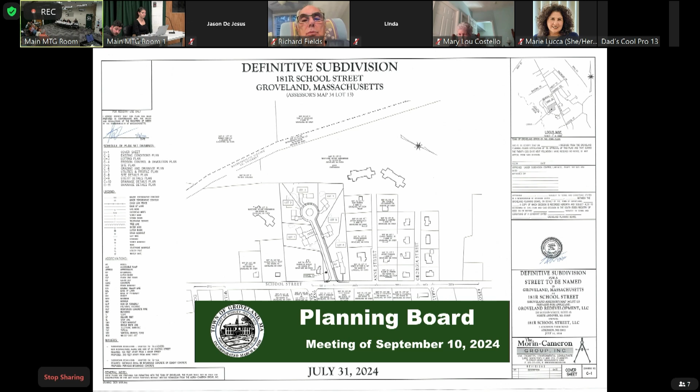So as you mentioned, it is in the R2 zoning district. The zoning here is 30,000 square foot lots, as you know, and 150 feet of frontage for your single-family dwellings. And when you do a two-family, it's 40,000 and 200 feet of frontage. We don't have any wetlands on this site, and I'm going to walk you through our process. The plans are kind of set up in the process through which we go through our vetting and design process.

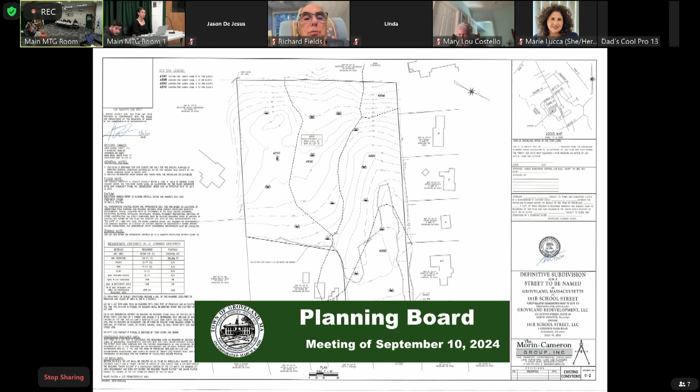So right out of the gate, we did a survey of the property. This is topography and boundary. During this process, we are investigating all the utilities that support the project: the public water in the street, the public sewer in the street, electric, communications, and if present, stormwater management. We also conducted extensive soil testing on the site, a big part of our design work.

Oh, is there a light? I'm not going to touch anything. Right over here. EJ's back here. Brilliant. Thank you.

The soil investigations help us understand factors such as water table, our soil type and consistency, which plays into what we can do with infiltrating water into the ground, and evaluating any of the conditions of the site. In this case, it's a wooded lot with developed land all around it. The Whitestone Village, which I assume a lot of folks are here from that community, wraps most of the property, and then there's developed single-family homes on the other side. So everything around this is developed for some sort of residential use.

It has frontage on School Street. The orientation of the plans, I kept the street at the bottom of the plan, as you see here. North is actually more to your right, so School Street's kind of a north-south orientation. So I'll talk mainly to the plan orientation as we're going through this to make things a little bit easier.

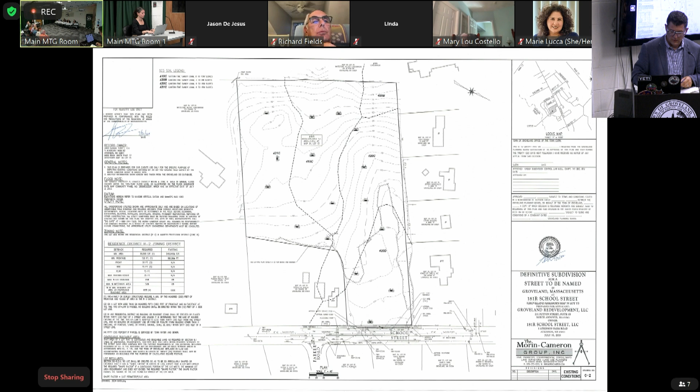So the subdivision process, as you're well aware of, is a state statute that your community adopted, a subdivision control law that enables landowners to create access to their land for development of homes. In this case, we are proposing a 575-foot-long road that's measured from School Street to the end of the cul-de-sac. And that street would create the frontage for the 6 house lots that are going to access through that street.

It would ultimately be our intention that the street, because it complies with the subdivision regulations, would be adopted as a public road. The typical process, we don't have any intentions for it to remain private. We can vet that process as we go through this, but our intention would be that the geometric and construction specifications for this road are going to meet the town standard, and thereby could be accepted as a public road eventually.

Starting from Lot 1, which is the bottom left corner. So starting in Lot 1 here, this is a 40,000 square foot lot with 316 feet of frontage. The next 4 lots all have 150 feet of frontage and are 30,200 square feet, 30,030 square feet, 32,800 square feet, 32,700 square feet, and then Lot 6 here, 40,000 square feet and about 316 feet of frontage.

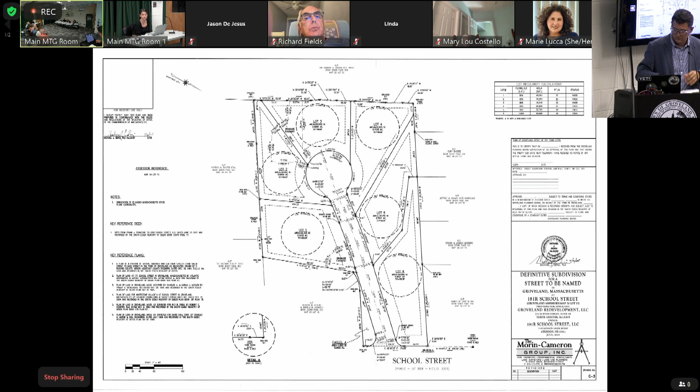Walking through, so we included information here. We're also applying for the land disturbance permit for this. A big part of construction is managing your project during construction. There's a period of time where you have cleared the trees, you've altered the land, you have exposed soil. How are we managing that?

This project would be subject to all the federal statutes for stormwater pollution prevention that are very commonplace these days, as well as your town bylaws and oversight. In past projects, and I don't expect this to be any different, your consultant has also been with the project throughout construction to help oversee it. So eyes from the community's representatives are also on the work.

In this case, we took some time to size temporary sediment forebays or temporary retention ponds to make sure we're controlling that. Ultimately, there's a very extensive specifications book that goes with construction on all the procedures and specifications that you need to effectively manage the construction project.

I included areas for temporary soil stockpiles, erosion controls, and most importantly, we did do our best to preserve a wooded buffer around the perimeter of the project, which was another piece of feedback that we got during the preliminary process.

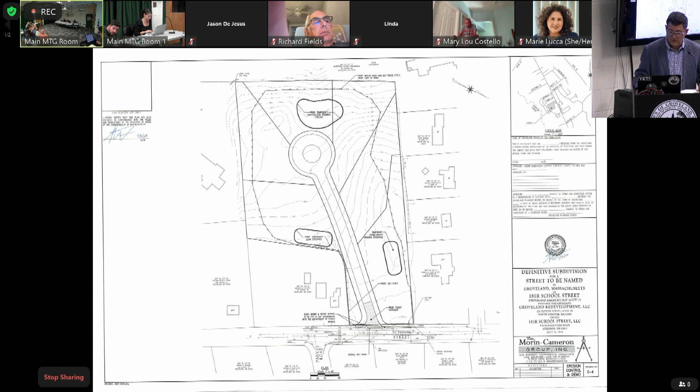Now, what's interesting with subdivision control is to create the road and the lots. Most town regulations, and yours included, want us to demonstrate how they would be built. So it puts us in a situation where we design the entire project, we design homes, but of course, the project is just to build the road. The lots are vacant. Then they sell them to a buyer, so either a homeowner who's going to build their own house, or maybe a builder to build a spec house, something like that.

But that goes through a building permit process. There's an architect and other things. So we don't have the benefit at this stage of the permitting process, which is day one with you, of knowing what the house designs will be. So what do we do? Well, we still have to make sure everything's engineered properly, and we're accounting for development of those properties. So what we did is we assumed larger house footprints, larger driveways, more clearing than what we realistically expect the development to be.

So we're accounting for all that information and data in our stormwater management design. That's an important part of the work that I do, that your consultant, TEC, will be reviewing on your behalf. So we are accounting for not only the road, the sidewalks, and that work, we're accounting for the homes, the driveways, and larger yards around the homes.

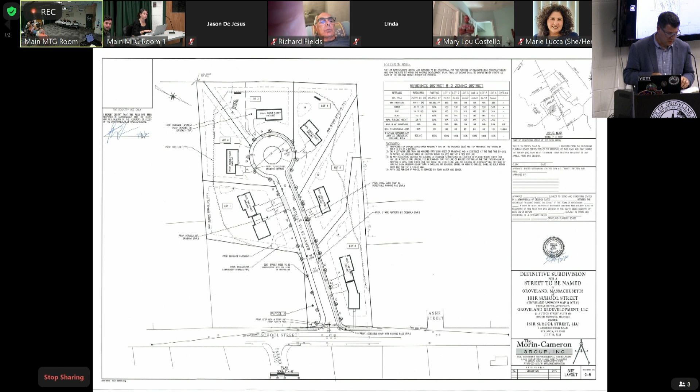Right now, the site itself hasn't been touched. It's been partially cleared, so it's kind of a mess. But this would infill a home, and we will orient the front door to face School Street there. Even though the access will be through the driveway off the new road, it will appear as a home fronting on School Street, which is a nice corner lot feature we included, and that was a request from staff at an earlier meeting.

Moving along. The next plan gets into our grading and drainage. This is the bulk of our engineering work. We spent a tremendous amount of time on stormwater management, the grading of the site, and notably so, one of the more common points that we heard from the preliminary process was concerns about stormwater management.

The slope of the property goes from School Street at about elevation 100 to the top of the plan, which would be west, at about elevation 70. So about a 30-foot grade change across the property, and everything slopes down that direction. There are small bits of the property that might go more to the southeast. The bulk of it goes to the southwest. You have some little areas that go kind of to the northeast, and a little bit that goes out to School Street. So we're counting, and we're getting into the nitty-gritty of where water goes now when we're looking at the stormwater management.

And one of the best ways we can ensure that we don't have any issues with stormwater is we just don't let it off the property. How do we do that? So in this case, when we were looking at the stormwater management, we're designing a roadway. As rainfall lands on the property, on the roadway, on the homes, it's going to drain towards that pavement. So the first thing is catch basin grates, which we're familiar with. We see those. Hopefully nobody's dropped their keys down them before. But that's intercepting the water coming down the road.

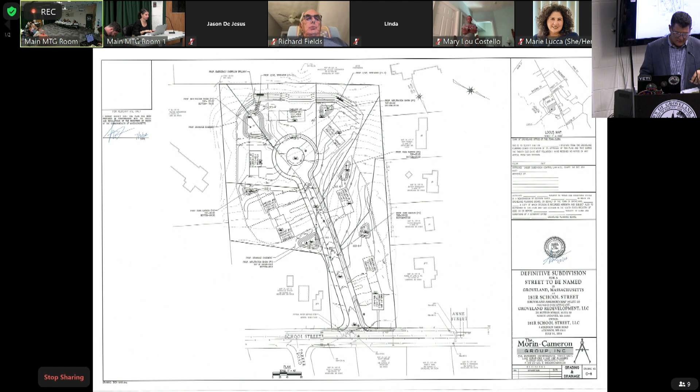Yes, I am using a pointer. I can't really, it's hard in the Zoom. I saw that message pop up. Let me see if I can do both here. All right, for those online, okay, we'll use this here.

So we fill this up so that the cul-de-sac itself is a low point. So if the basins fail, it's going to fill up the road, instead of letting that go out. So some fail-safes built into this to ensure that we're not letting the water go out. Even in a catastrophic situation, there's a lot of redundancy built into the design. Your consultant's going to go through all that in a lot of detail.

As far as the slope of the road, I have been talking about the grade change. The road itself isn't very steep, as it turns out. We're well within the vertical design parameters of the subdivision regulations, 30 mile per hour design speed. It's relatively straight. There's not a lot of vertical curvature. We have slopes from flat, so we come up a little bit at School Street. So cars that are exiting onto the street are at more or less a flat elevation, so we're not having to go uphill to exit. It's flat and tipping down a little bit back towards School Street. That helps with your cars getting in and out of the property.

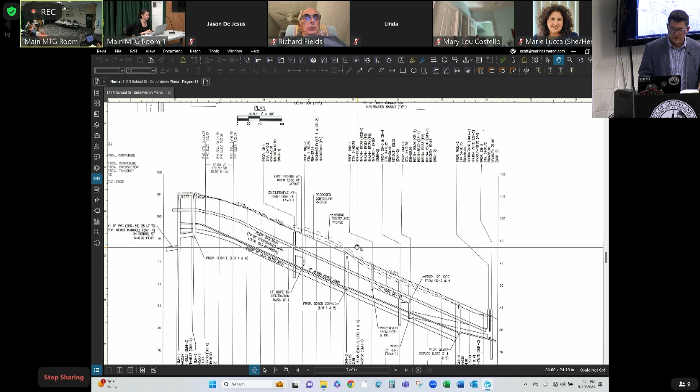And then we're looking at 3.3% slope, 4.5 maxing, 4.3, and we carry that through. It's your normal sidewalk slope. It's under that. So we're relatively flat with the construction of the road. And that's more or less following the existing centerline topography. So we're trying to balance. We have a little bit of cut here and a little bit of fill here. So we're trying to minimize earthwork, and that's another important aspect to getting the work done quickly. We don't want a massive excavation project where we're moving dirt around for months upon months. This should be relatively quick because there's not a whole lot of earthwork going on.

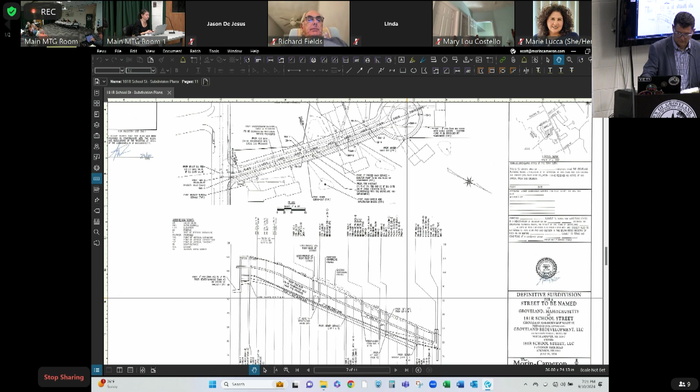Okay, I'm going to go back up a little bit here and talk a little bit about the documents in your package. I'm just going to the cover sheet because this shows kind of the context of the property. So as far as utilities go, there is public water available, there is public sewer available. Because of the elevation of this property, each home would have its own private ejector pump. Those would pump into a common force main, and that goes back up to School Street.

Again, this is typical when we have these situations, but your engineering team will review all that and make sure they're satisfied with it. And there's electric available, of course, and communications. We're not making any connections to any closed drainage, so we don't have any connections. We're controlling and managing the stormwater within the property.

As far as transportation, I did include in your packets information on transportation. Single-family dwellings, on average, generate a little under 10 trips per day for your average single-family home. This is the Institute of Transportation Engineers data, it's very well accepted. There's a ton of data on single-family homes. So what does that translate to for us?

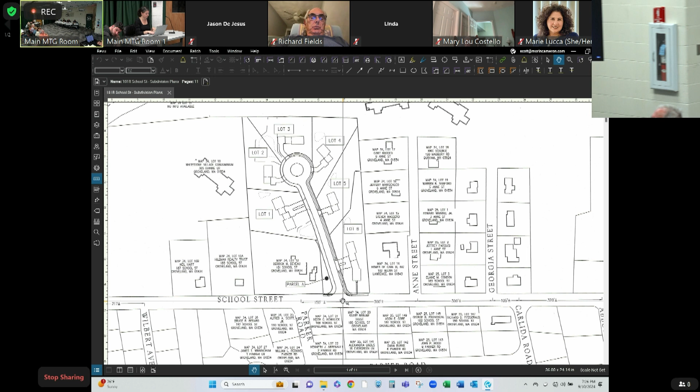And there's a couple things we look at, mainly is this going to create any safety issues on the public way with respect to traffic? Based on the sight lines and the very low traffic volumes, we don't believe there's any risk at all of any issues with traffic. This isn't an intersection that's being proposed on a sharp curve where you would have sightline issues. It's a straight road, it's wide, it's clear. It's also consistent with the neighborhood, and I did include on here, so you can see from Georgia to Anne Street, 300 feet.

The waiver we're asking for is from Anne Street to our proposed road, 300 feet, exactly consistent with that street line. Going down the other side, 217 feet between Wilbert and Doris, and then 320 feet from Carilda to Abbott.

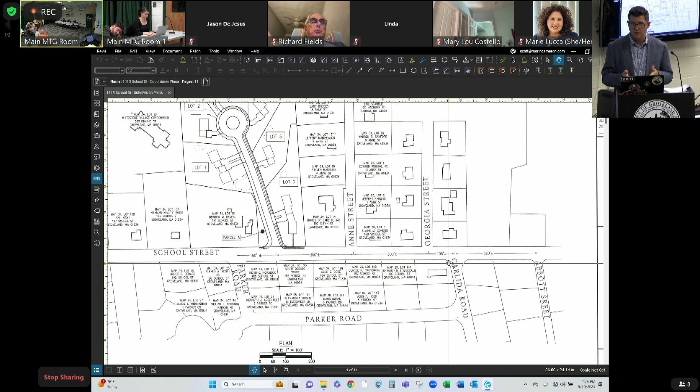This is also typical of the neighborhood. We're not asking for anything unique or different. It's already like this here, so we're not creating a situation that might create confusion on the public road. It's typical, expected, and consistent with the neighborhood. So we are requesting a waiver for that.

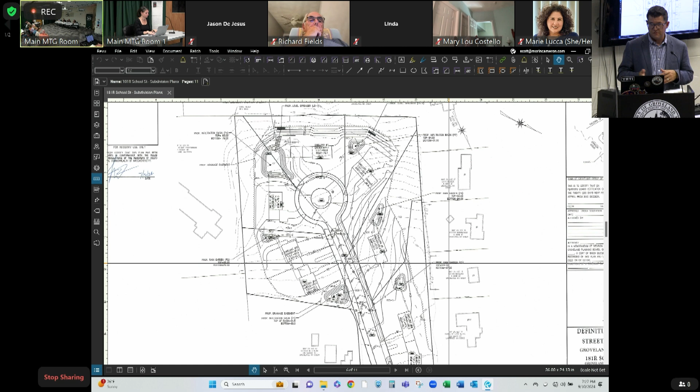The second waiver we're requesting relates back to stormwater management. This waiver is about our efforts to implement sustainable stormwater management and construction practices in all our designs. Your bylaws, state and federal regulations are all promoting this. It's been part of our culture as civil engineers for more than two decades, but there's a lot of focus on sustainability now, especially with climate change and more intense rainfall. We are very mindful of that.

So the second waiver we're asking for is hard on subdivisions because we have a town specification for constructing a road, and that's pretty typical — pavement, asphalt, curbing, sidewalks, very linear design. There's not a whole lot of creativity to it.

But where we can take advantage of sustainable measures is by making these sidewalks — close to 600 feet of sidewalk, 5 feet wide, not a small amount — a porous, permeable pavement. Effectively it functions the same as a lawn, or better, from what I've seen with these built. So we're asking for a waiver to modify the paving specification from normal pavement to porous pavement for the sidewalks.

Why sidewalks? There's no vehicles on them to compact them, you're typically not sanding them, and they require very low maintenance if any at all. I wouldn't feel comfortable asking for that for the road, because ultimately we're looking for this to become a public road eventually, which would go through a town meeting process. If I was a DPW director, I wouldn't want anything to do with that because I don't have the budget to maintain it. So the sidewalk, we think, is a

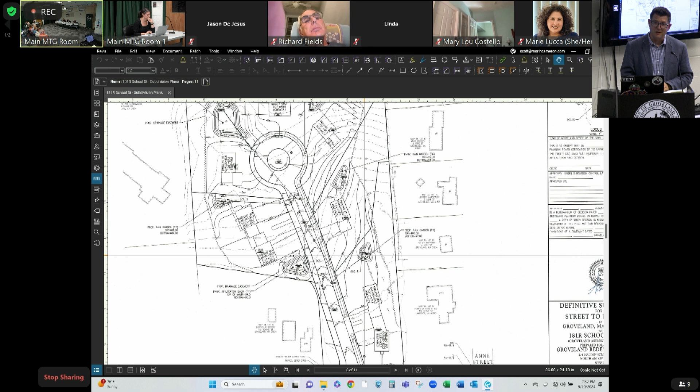Again, I don't have much more to present other than I do want to thank you for the time tonight. I know we have a lot of people here, and there's probably a lot of questions. It's our hope to take tonight. We waited more than 7 months since the preliminary plan, so we have 135 days on this application, which is a good amount of time to go through it and vet it. I know we funded the peer review already, so your consultant is funded, so we pay for that to review on your behalf. We're looking forward to getting this process underway with you, starting right now. So back to you, Mr. Chair. Thank you, appreciate it.

What's over here? Does anyone have any questions up here? You guys have any right off the bat? Think of anything right off? No. Did you have any outstanding? Nothing right out of the gate, no. I have a question. Not yet.

We're going to talk through the board first, and then I'll end up opening it up for public comment. I have a question about the... I actually am the board. Well, it just says Dad's Cool Pro 13, Wally, so I couldn't tell that was you. That is totally accurate. But anyway, thank you, Wally Sorensen.

Still, I've been listening to this, and I see the plan presentation. Is this Mr. Needy's project? Say that again, Wally, we couldn't hear you. Is it Mr. Needy's project? Mr. Tom Needy? Nope, who's up? No, it's just the Morin-Cameron Group. Is that Moore what I'm seeing on the Cameron plan? Morin-Cameron, Moore County. Thank you, yep.

When you mentioned in the process that you're just building a road, is there not a developer or builder assigned to this project yet? So the present plan right now is to permit and then construct the road. There very well will be a builder involved at some point, but right now Groveland Redevelopment LLC intends to build the road and sell the lots. So that could be to a homeowner, or as I mentioned in my presentation, to a builder.

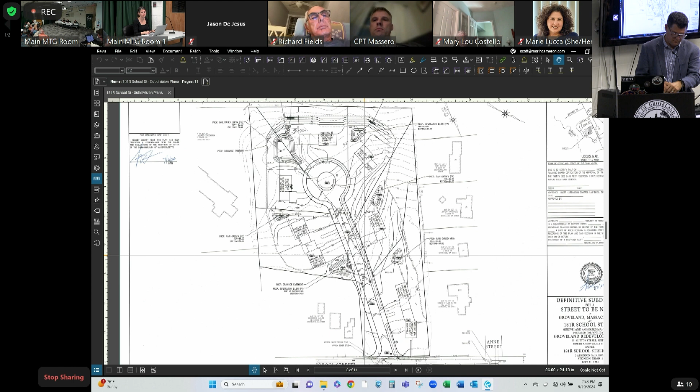So you're going to build a road, okay? Which means - and it may not be you - but there is someone on this application that will be in charge of the project, putting up the surety, and be fiscally responsible for every single thing that needs to be done. Who is that? Groveland Redevelopment LLC.

Okay, so that - and then that person is planning on just selling the lots off to the highest bidder? So who's going to be in charge to make sure the subdivision, if approved, is completed as the memorandum of decision is issued on each item?

If I might, Mr. Chair, Eric Loth from Groveland Redevelopment. I'm the principal sponsor, the developer, I guess you'd call it. The parent company I work for, which you may know a little better, is Minco Development. We're based in North Andover. I grew up in North Andover, I still live there. Our company's been in business there for over 40 years. We were the ones who, 3 or 4 years ago, brought forth the previous 40B looking development.

After a while, we realized that really wasn't going to fit in this location. So we came back with something we thought made a lot more sense and fit a lot better into Groveland, and we still knew there was a need for.

But I want to reassure all the board members and everybody here that we take a lot of pride in what we do. Most of the projects we build, we hold long-term. Most of what we do is larger apartment complexes. We've built over 3,000 housing units - condominiums, townhouses, apartments - in North Andover, Newburyport, Andover, basically the whole area. So I can appreciate the concern because I've seen that a lot of places too.

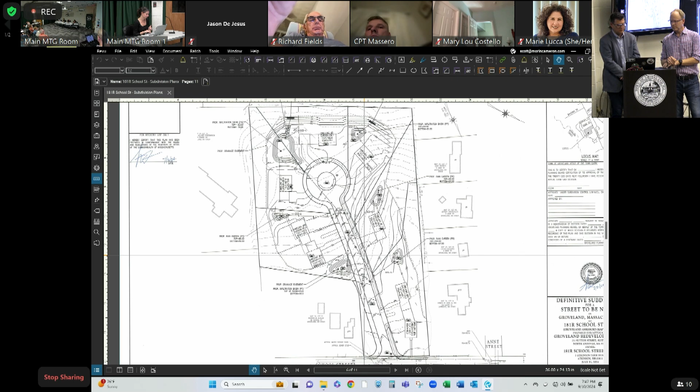Imagine if you have 6 homeowners coming in to get a house and they don't know how to build a road, a street, or get anything done, and things that they have to do on their own individual lot, and they have to put up a lot of money and buy the house at the same time. And building lots of homes in Groveland, like other surrounding communities, are really coming up in price. And that's an increased burden on the future citizen that we're responsible for as well.

Our current citizens, that's who we work for. And the future citizens, protecting them during this development. So something that you can work around in-house. We don't need an answer on that right now. But it has been a problem in a few subdivisions, and the board will have to discuss very large stopgap measures to prevent those kind of things from happening again. But the simplest thing is just assign a reputable builder developer to it, and then there's no issue with those kind of things. So, suggestion.

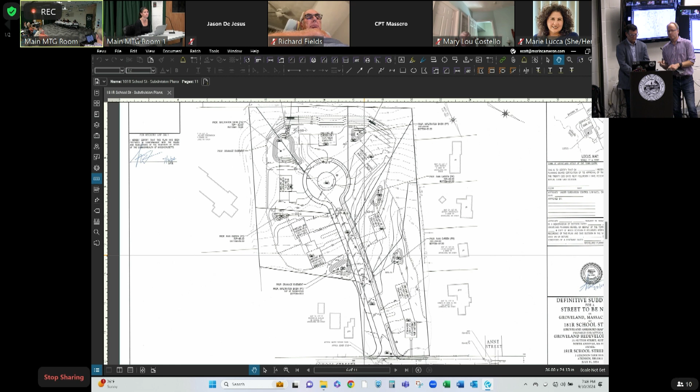I appreciate the comments, and just to answer one of the questions, our plan right now is at the very least to stay involved, build the road, and complete the lots before we'd think of selling any of them off. So we will be responsible, we will be involved all the way through that process. Just for us, the economics of building homes doesn't really work for us, but we do want to stay involved, build the road, and do everything involved with the lots, and then sell the finished lots. I've talked to a couple of builders already that said, I'll take all of them together, so that might alleviate the board's concerns, but I don't know yet until we get to that point.

So, thank you. I think if I could further, it is our first meeting, and I'd like an opportunity to probably talk through with staff and look on precedent, recent subdivision decisions that you've issued, and make sure this is in line, any issues you had on those prior ones, that we alleviate those with this one, and just keep it fair and equal to things you've done in recent past that maybe was a success. So let's learn from it and make sure that we keep things fair and equal.

Agreed, and that's why we have these meetings. Yep. Right, that's why it's not a one-time thing. And Wally, thank you. That's one of the benefits of having someone like Wally, who's been around a long time, to have the history of the town with that. So, thank you. I appreciate it.

Quick question for me was, when you talk about the redevelopment, are you doing all the way through to grading and drainage, or are you leaving just a lot to build? How far into the build? Yeah, please. Absolutely. So, again, this is going to distill down to your process and what you typically do. In my experience, we typically want to have the road up to binder, so it's stabilized, all of your supporting infrastructure is installed, so that when the builder comes in to do the house, they're connecting to the utility service stubs and they're ready to go. So all that work is in place.

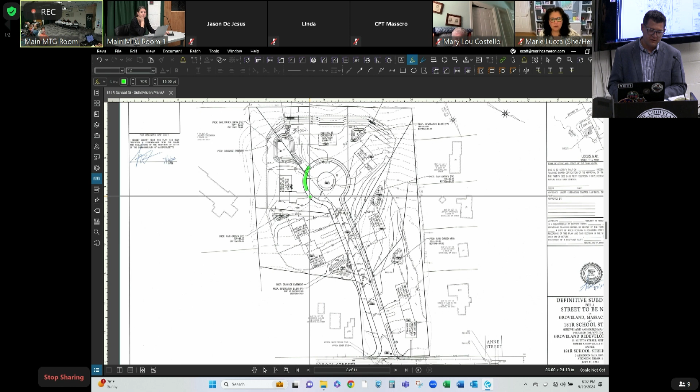No, I think our question is, it looks like there's an outline that basically is the same as the other side. Oh, I see what you're asking. Yeah. It takes me a couple times because I'm an engineer. Oh, no worries at all. It takes me a couple times because I'm not. Right, we're lay people. Different languages. All right, exactly.

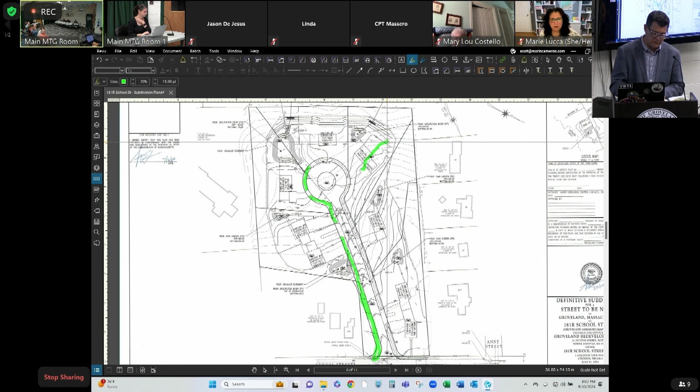Presently, on this side of the street we just have this as a grass strip, which would contain your street trees all the way down. So this would just be lawn vegetated on that side. Yep, and it looks like what you're seeing is the edge of the right-of-way line and the edge of the pavement. If I were to zoom in on this a little bit so you can see it in more detail, again, 40 scale drawings are hard to read sometimes. We're zoomed way out. That's what the regulations ask for.

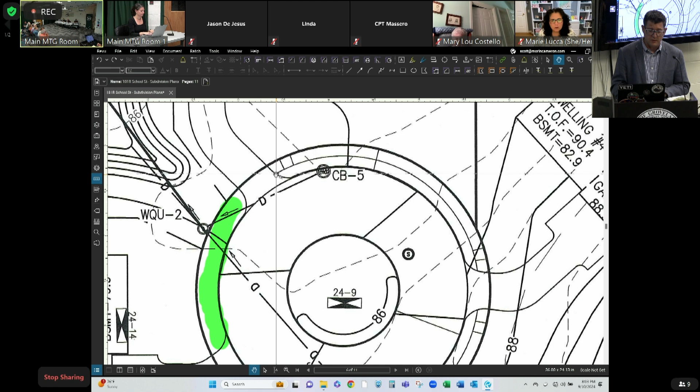Which is typical. This is the sidewalk line here. So you see on this side, we have the line, these lines going across indicate the curb ramp coming down, and there's details for that at the end in the construction detail set, and that's all per town spec. So the idea being we're taking the sidewalk, in this case, we took it here. We didn't bring it to this driveway because in my experience with these small subdivisions, even if you have sidewalks, nobody uses them because there's not cars on the road frequent enough to warrant that. Off of School Street, a numbered state route, we're going to take a look at it, and we'll report back to you at the next meeting. So we hear the concern.

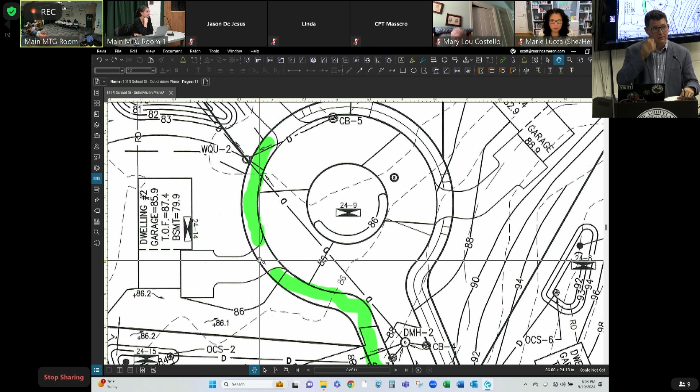Just out of curiosity, was it explored to have a sidewalk going all the way around? It's my understanding, I may be wrong, it happens occasionally, that it's only required on one side, and all of the subdivisions that you recently approved, being Billis Way, which is also on a state highway, 113, and Katy Lane, all have the half sidewalk. They do not have the sidewalk that comes up fully around. So it has been historic, and it is per regulation that it only be required on one side. You could do full side, it doesn't say that you can't, but it doesn't require it. It only requires half, and all of the other subdivisions that you've approved recently would follow that.

Yeah, no. I challenge that. The regulation is for a sidewalk all the way around. How they've been getting around that in certain areas, for instance, Katy Lane, as you mentioned, up off of King Street, because there was not a sidewalk that connected all the way up, was that a waiver was issued on that. That sidewalk, particularly on a state highway, is required on both sides. We'll look into that piece of the regulation. And like I said, one of the biggest things that we had during the town survey was not enough sidewalks for people to go on.

And as a father of 3, I can tell you, I was pushing strollers on sidewalks, and any parent, you don't know what's coming down the street, and I don't mean the residents usually, the UPS guy, the FedEx guy, some guy making a wrong turn. The last place you want to be with an infant or young children is in the middle of the street. So I challenge that with any parent. They may push back a little bit on your logic on that. But let's take a look at the sidewalk around on both sides. The planting strip has been eliminated, where you mentioned the shade trees. And for good reason, we do still have to have the 2 street shade trees but they're put into the lot.

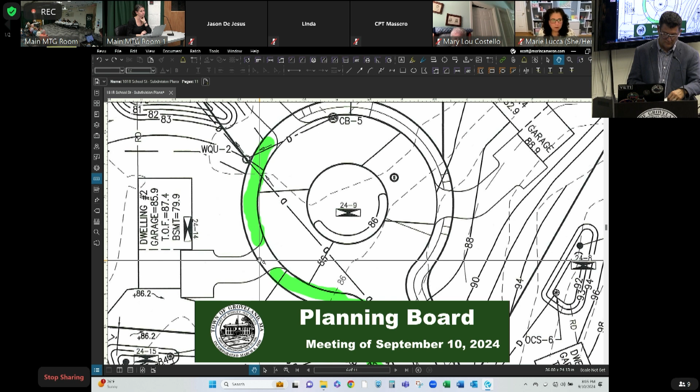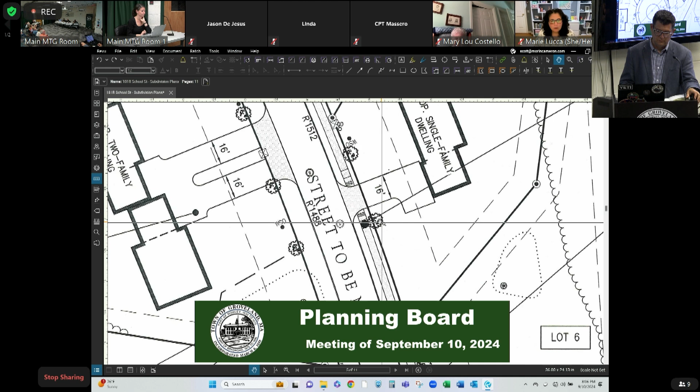And the reason what's happening is if you put them in the planting strip, as they mature, they break up the sidewalk and it becomes unusable. So about 18, 19 years ago, we actually kicked them off the planting strip into the property. It looks better to have 2 trees on each person's lot going in, and not in a planting strip, which will end up, or someone will end up, replacing the sidewalk, or it just becomes unusable when the tree roots get large enough. So just to keep that in mind as you're going through with those 2 things.

I'm sure being this is, although it's a definitive plan, it's still really the first time that we're taking a crack at this. So all these little things will actually sift out, and I'm sure they will come into compliance without an issue. Yeah, no, exactly. And not to belabor the point, like you said, I appreciate you taking the comment back and reviewing that. But, as someone who doesn't have a sidewalk in front of their house and wish they did, thank you for taking a look at that.

Sure thing. Yeah, I feel the same way. I have 3 young children, and it's always more convenient to have that sidewalk and the appeal of actually buying a home. But at the same time, I can see that extra yard as well, that frontage. But we'll look at it. So thank you. Thanks for the feedback, yep. Appreciate it.

Jason, do you have anything else? No, I'm good. No? Okay. Wally, do you have any other questions? No, I think that's good for a first round. I think we've really got a lot of missiles in the air on this thing to try to figure out little things and sift them out for later. So, no, that's good for now.

Agreed. Thank you. So I think we have a scheduled meeting already again on the 24th, I think is what it is, in 2 weeks. Do you guys plan on being here for that as well? Yeah, okay. I just wanted to confirm the dates to make sure when we do have more questions as well. As we start to read, now that we've seen this, we can review it a little more in depth, knowing that we've answered some questions, and then it can all be via email as well, right? But at the same time, it's nice to have the back and forth as well.

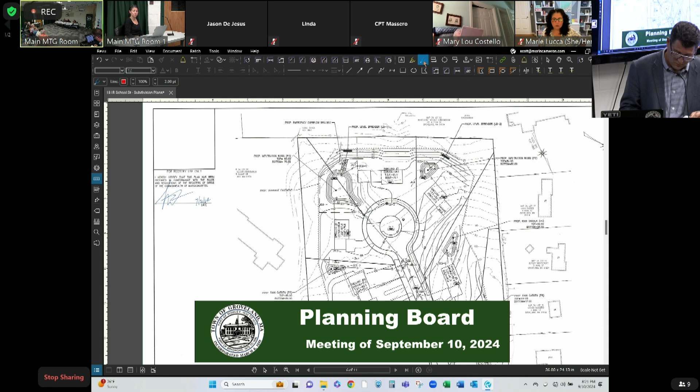Through the chair, thank you for the feedback. We did look at this area closely, but I'll go out and have another look at it and see if there's anything else we can do to ensure your confidence. Yeah, and I know the board talked about the vegetation, and so that is one of the concerns we have: looking at a wooded lot is much more attractive than buildings, so we're looking forward to some vegetative plans. Yeah, absolutely. Thank you for your time.

Thank you. I have a question as well on the pervious. Did I hear that correctly, that the street and the sidewalk itself are going to be pervious, and that there's no closed catch basin system on this? 'Cause I can't see that sheet. Sorry, just the sidewalks. No, the street is spec. Okay, that's good.

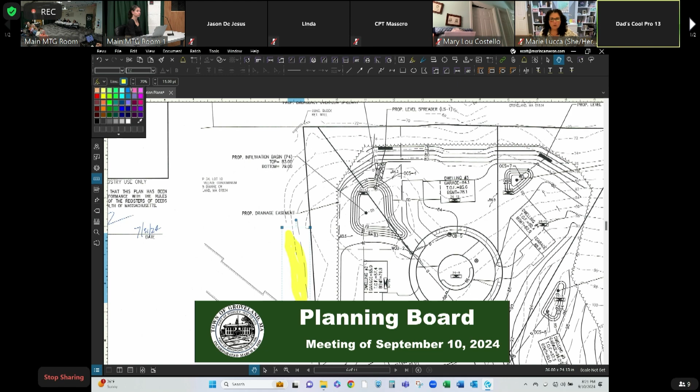Just a board history thing. One of the first places that we looked at this kind of asphalt, which sounded like a really good idea, was up at the old high school and the middle school, and we were looking to get some of this in there to check it out. There were two products out at the time, the engineers might remember. One was called Glassphalt, and it had recycled glass in it, which actually made it reflective in the evenings as headlights came off it.

We did a sample of it just to see how it would work. And the problem that we had is it does become clogged later in time, and it became impervious. And this is New England. If you're going to put up a house today, which, if they're selling, is pretty close to 7 figures these days in certain areas, you can bet people are going to be throwing sand on their driveways and sometimes salt on the sidewalks as well, because of the liability issues. So I would just caution not to think people aren't going to get out there with a spreader, or have their own landscape folks come in and sand and salt.

So something to consider. We did look at this from a town's perspective with a previous road commissioner, and it sounds like a really good idea, and it's wonderful for recharging the underground aquifers, etc. But it did come up as a problem once you enter humans into it, future homeowners and residents and citizens of Groveland, because they are going to throw sand out there. This is New England. Sometimes you get an ice storm. Now, I don't know the limitations of that, but just something to think about. The board can review that.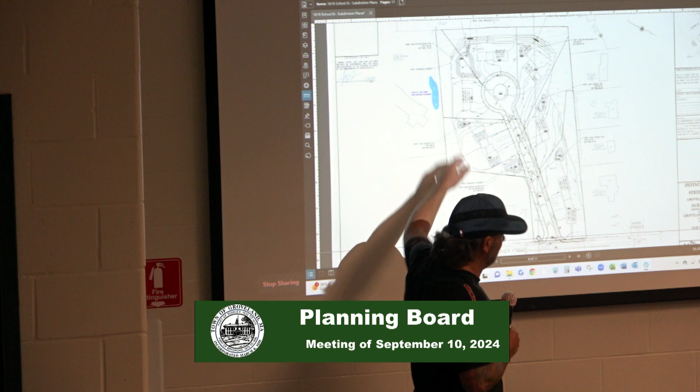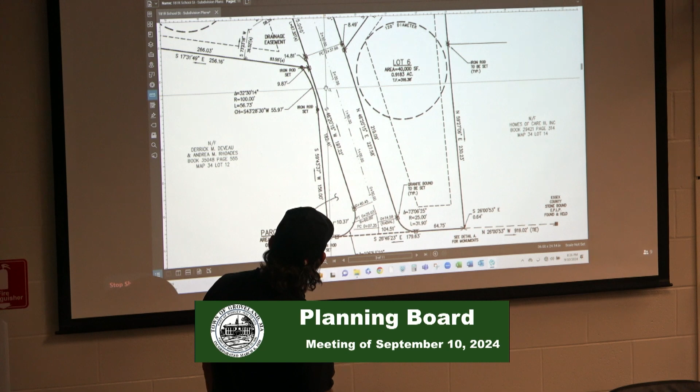But I'm really concerned about the water in my backyard, and what is the distance from here to the road from my lot? Which area? Yeah, where's the corner of my lot right there, right? What's the distance? You guys are getting really close, and you said like 25 feet of coverage with trees, or did I hear that correctly? Not in this area. Right. So I got trees here now. This was already cut down before, which exposed my whole lot. And now you're talking about 25 feet, and we're getting really tight here next to my lot, looking at the street and the development. So water and the 25 feet, I just don't see it.

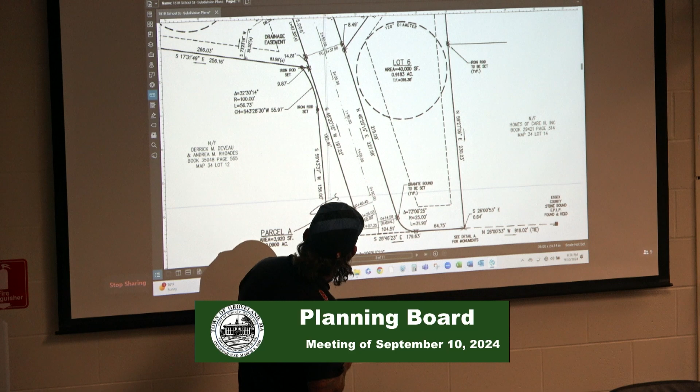What is the distance in this area, do you know? So this is about 20 feet here. And to your point, there are no trees through this area. This had been cleared. Well, they got them all cut down, right? They weren't supposed to cut them down right next to my property. So that was a concern before, because they cut them straight from the whole area. So is there a regulation, with the road being that close to my property? What did you say the distance was right here? There are definitely setbacks, that the road cannot be certain feet from your property line. That's what I was concerned about. And it's a difficult scale, right? That's why I wasn't sure what the actual distance at the shortest point actually is.

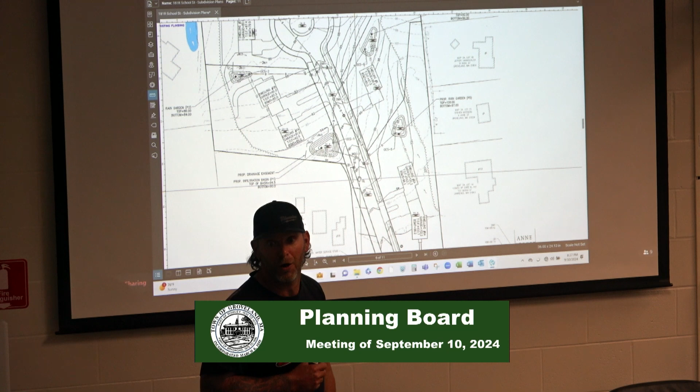At the shortest point, it's about 4 feet at that pinch point to the right of way. But the road itself is another 11 feet away, so you have about 15 feet to the actual road. But then you're gonna have the curb, right? So that doesn't really allow for any tree coverage in this area. Yeah, the curb line is considered the street line. Oh, okay. And what is the distance? Is it 15? I don't know off the top of my head. It's about 15 feet from the pavement itself. So there is space in there, and I appreciate the feedback, and I'll certainly get out and have a look at that area and see if there's anything we can do in that spot. And then you're talking about an area where you dig a hole.

I've dug holes in my yard and it fills up with water and stays there for a long time. So the aspect of digging these holes, it fills up and then it overflows, and the water is a big concern in this area, and that's the biggest thing with me, really. Yep. Okay, thank you. Thank you, I appreciate it. Absolutely, thank you.

This gentleman in the hat, yeah. Hello, Rick Fitzgerald. I live on School Street, across the street from this new proposed development. And I'm looking at the plans versus the previous plans, which I think called for 6 single-family homes. Now we've gone from 6 families to 8. So we have two more families. And are these 2 families going to be affordable housing?

Does anybody know in terms of that? Like I say, we've increased the population on this street from 6 families to 8. There's 4 singles and 2 doubles, so now we have 8 families on there.

Rebecca is much more versed in affordable housing, but that's a state application that would need to be applied for as a 40B project, and this is not a 40B project, so it is not an affordable housing project. It would just be...

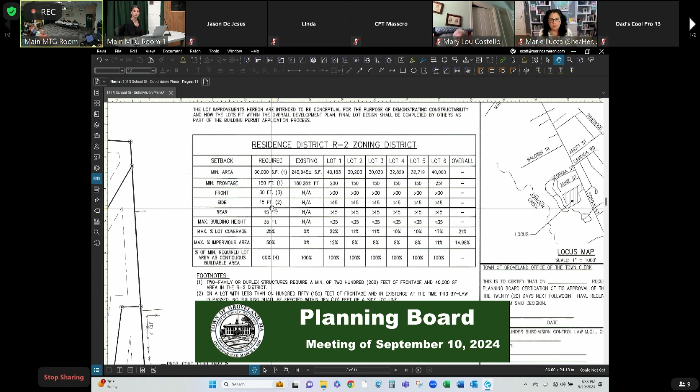So the zoning dictates the minimum setbacks, and I want to call your attention to the setback table. The zoning says that from the frontage, which would be the proposed road, it's 30 feet, and from the side and rear, 15 feet is the closest someone could build a home to the lot line. This is per the zoning bylaw.

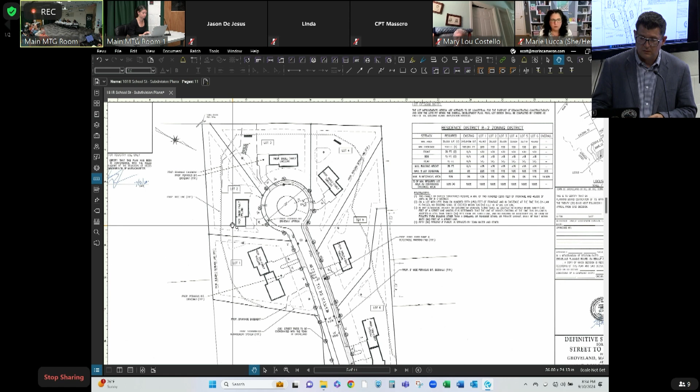We've graphically depicted, again our best guess, a large rectangle - we don't typically build homes in rectangles. But you can see this dashed line is the 15 feet, so from here to here is 15 feet, about the width of my cursor. So if we go 15, 30, 45, about 60 feet is how I've drawn that there. So there'll be 60 feet from here to the stone wall, and then the lot line - which you can see in the other one is quite close.

There's an abundance of trees there now. Are they going to be able to clear all the trees out right up to their line? Or is there going to be any type of regulation as to where the trees will stay, so we'll have some privacy and noise buffer?

Are these trees you're looking at right there planned? That squiggly line right there, that's the tree line that would be proposed - it wouldn't be planted, it should already be existing, correct?

Yeah, it's our intention to preserve the trees in a 20 to 25-foot swath in this area of the property. Everything from the stone wall in, 25 feet back, you won't touch. So we at least got that.

There'll be no plantings - like on the rail trail where the horse farm was, they planted some nice 15, 20-foot high evergreen trees to keep privacy and noise down. Again, through the chair, I think we talked about better defining that - the actual width and how we're going to define and protect it is going to come through this process.

We're going to go back in between now and the next time we see all of you, and I hope you all come out to the next meeting too. We'll have a better understanding of what and how we're going to do that.

Just so I'm clear, I thought when you were making the presentation you said that the footprints on this diagram aren't necessarily the spec. So a builder could decide to move it closer to the boundary than what you have depicted, so long as it's within those setbacks. But if there's going to be a tree line in addition to the ordinary setback, obviously you can't build a house right abutting the trees. So I think it would be helpful to at least get a concept of what that tree line might look like, so people can get a better idea of how far this house will be at minimum from my place.

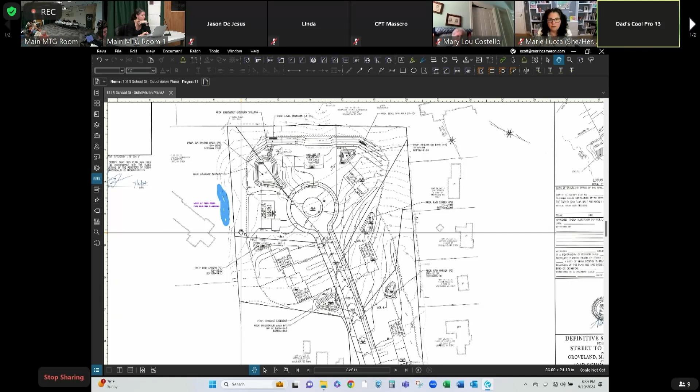But a second question, and thank you to the residents for pointing this out, is that this is exactly the scenario that happens when lots get sold off and the person goes in and doesn't know, or in some cases may pretend not to know, and then a tree line comes down. So the tree line has to be established by the planning board with markers and everything else. And then the buffer zone gets added afterwards because things do happen on a site, and you have to move a house here or there, and you go back in because you can have an established tree line and still be looking into somebody's window.

So the board typically goes in with a double-staked tree line for some kind of buffer zone of hemlocks or something to that effect, and we've done that in the past on almost every subdivision going through. That will eliminate that. And I completely understand the concerns of the residents, and remember, that's who we work for.

But I did have a question that somebody touched on, which was the two-family. Although it's a good concept, and I understand we need affordable housing in the town of Groveland, particularly for seniors, you're going to have an interesting time depending on the builder, and that's why I suggested you find one going in. Because if you're putting up a good-sized home that sells at 1.3 million, which could happen in Groveland, and then you stick a duplex in that may not be up to that value, it's going to provide some interesting sales techniques, shall we say, in development in the neighborhood.

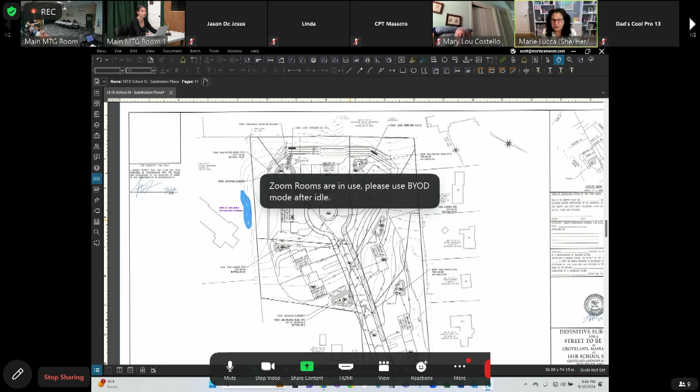So once the property gets sold or the house is built, if water comes on my property and my neighbors, you would sue the property owner, not the developer or the... You would potentially have legal ramifications through the developer, but you would also include the property owner. So that would be a civil battle. It would not be something that the town would be involved in. So if that were to occur, then you would need to contact an attorney and follow the proper suit. But we're not in a position to provide any legal advice at this point in time.

I would imagine the developer is probably going to dissolve that particular company as soon as this development is done. You set up companies with the intention of doing a particular development. That company will be gone. It still would be a matter for the developer and the property owner. It's not something that the town would be involved in. And then the second question, what is your errors and omissions insurance limit? Mr. Cameron?

You're asking for what the insurance, what was that? I couldn't hear you. Your errors and omissions insurance. So if you've done this... I am insured. I guess I don't feel it's appropriate to be talking about that at a public meeting, but I am insured. I've never had an issue in 20 years of practice.

Okay, so you don't want to answer. So if our property is flooded and we try to come after you, you will not tell us what the amount would be. I just want that to go on the record. That is very scary, and I think all of my neighbors and all of the people who are surrounding this development should be very, very concerned. We already have water problems, and I am certain this is going to be extra.

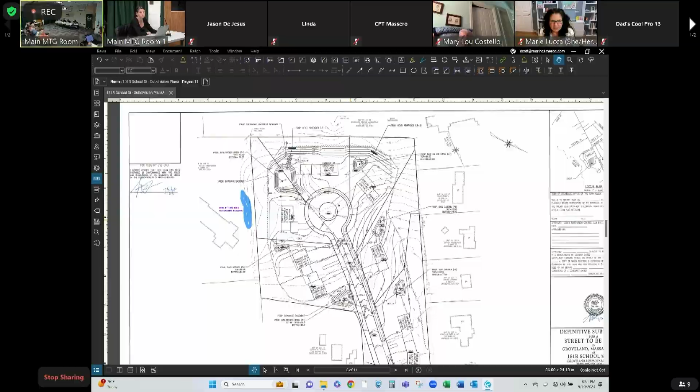Thanks, Wally. Yeah, and I've only been here 3-4 years, and I've already done site visits myself. So it's definitely something we do when we hear residents coming in and saying, "Hey, this is going on. We see water. It's still being developed in the entire subdivision." We go out and take a look at it, and our town officials do the same thing. And remember, this particular project had been submitted a year ago, and water was one of the big concerns, so that has been revisited and is already in the back and forth between developer and the board.

Yeah, and I was going to make a point of that as well, for everyone's peace of mind, and for any future questions they might have. Water is certainly a concern. We understand your concern about it. It's also one of our bigger concerns, if not our biggest concern for this project. So please know that is foremost in the board's mind right now, what that water impact would be, what that drainage would look like. Certainly, it's one of the major things we have our peer consultant reviewer going through as well. So please know that is something we're seriously concerned about, and we're working very diligently with the applicant on this.

We know how difficult the water is in our own properties, and it's even worse in other places. TEC, when they come in, they look at all of these elevation levels and they say, okay, what you have here doesn't work. That's why we have that peer review with TEC. So that's why we wait on their feedback as professional engineers for their guidance. So hope that helps a little bit. Thank you, Marie.

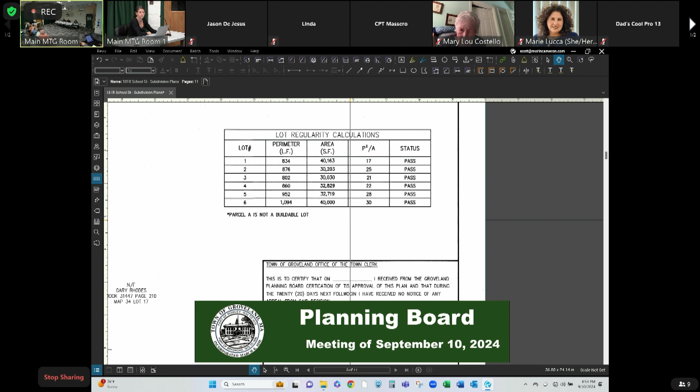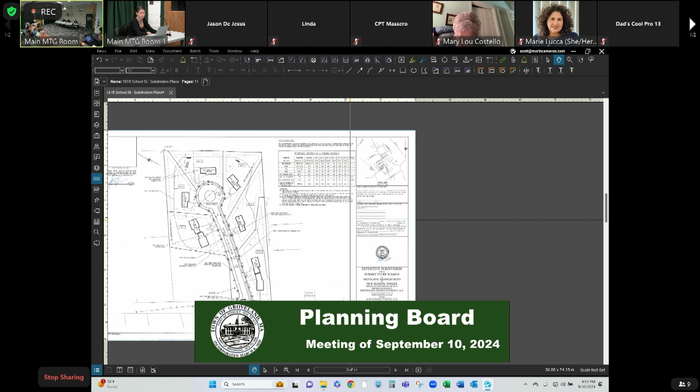So we did talk about the distance between streets earlier. That is one of the waivers that is going to be discussed, of dropping it from 400 to 300 feet. The 300 feet is the same distance from Anne Street to Georgia Street. So distance-wise, it meets those, looks at that same uniformity. But we will review that. As far as the way that the street is set up, if you're coming in from the Anne Street side and then exiting, I think the exiting from street to be named onto School Street is actually, for me, a nice layout because it has that open corner. But it's definitely something we'll review.

If you're exiting that street and you're turning right, I mean, that's a sharp angle to turn right on. And if you're coming from the Georgetown side of 97 to turn left onto that road, I have a hard enough time turning onto Anne Street, which is just a 90-degree turn at times during rush hour. Agreed. It's a tough street. Again, I think when we did the traffic study, it was only 75 cars max and it wasn't an extended amount. Well, I mean, I left for work this morning. I go through Georgetown to get to 95. There's traffic from Ultimate Perk this morning all the way to the light in Georgetown. There's a ton of traffic on that road.

If I could, maybe, Mr. Chair, speak to it a little bit. Graphically, the right-of-way does align on an angle. It meets the subdivision regulations. That is a requirement we have to engineer to, so we're well within that angle to the main road. But one thing we did do, and I didn't talk about this in the presentation, so I apologize for that, we did actually engineer it so as a car approaches School Street, the car actually angles to 90 degrees. So for the experience of the operator exiting the neighborhood, they're going to be exiting at 90 degrees to School Street. It's just how we worked with the curb lines and the striping and the stop control signage at that spot. Okay, thank you.

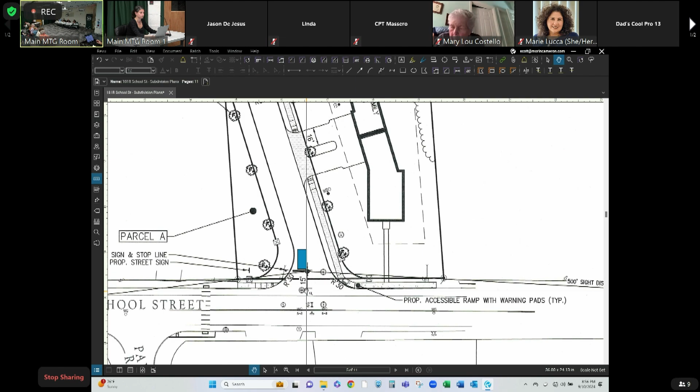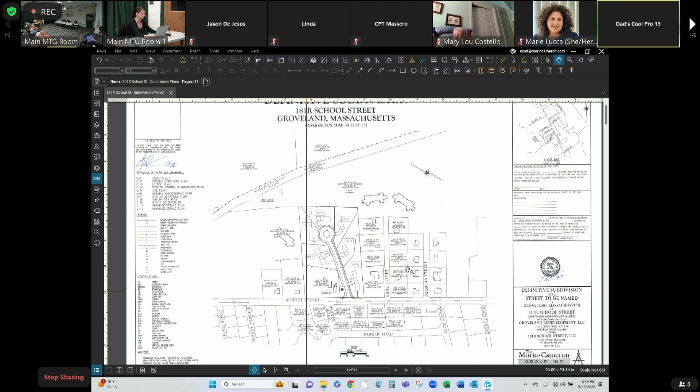Well again, the traffic study will be done on this from an exit point, okay, and Anne Street and Georgia Street are older streets that came in. So the requirement today is what's present. I heard the word waiver on a line of sight distance. Do you have a list of waivers that you're submitting in this application? Not line of sight, Wally, it's intersection waiver. Intersection, okay. Yeah, the line of sight exceeds, so we're good on line of sight. It exceeds that limit, but it's just the actual intersection to intersection that is the waiver that would be proposed. Okay, thank you for that. Are there any other waivers on this list? Because usually that's a requirement too, you have a waiver list. It's the one about the permeable sidewalk. Okay, so just the two? Just the two waivers. Okay, so that's something we'll go out and take a look at.

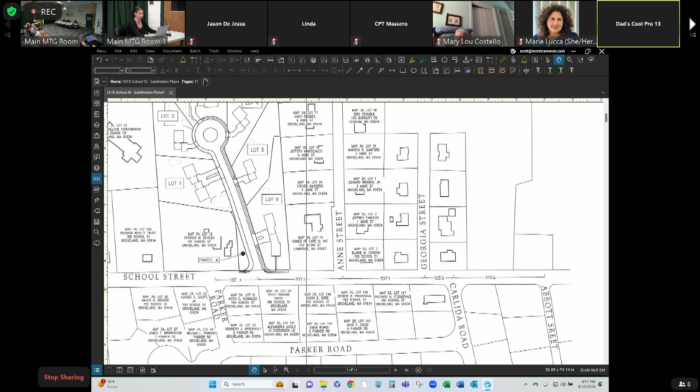And I agree. Just pull up the Merrimack Valley traffic counts, and 97 gets anywhere from 10 to 15,000 cars a day. And Salem Street is another surprise, which is why that set of lights appeared in the town of Groveland, because of the amount of traffic. And it is a problem. And we all know about the problem going down in Georgia with trucks and everything else with the one-ways and people that aren't supposed to be down there. And of course, that's a bigger project. But traffic is clearly a concern that we're aware of. And we will be getting out there and taking a look at that and always do what's best for the residents of Groveland on that.

Because we may be turning out of that street, might be doing an inspection and come out, and you need to have what you need on that. So we'll take a look at that, but it will be part of the traffic study count. And I know there's data that's been provided, but we'll take a look at the other stuff.

Thank you. One more question, please. Absolutely. You've been patient. All right? Yep, absolutely. Okay. I'm Diane Caravan.

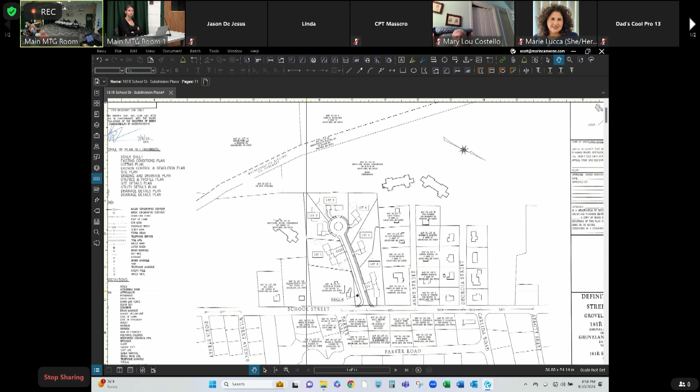I'm on Diane Circle an abutter, and I'm going back to the water situation. First of all, I would like to ask you whether or not the catch basins are installed at the time the road is built, or if each one becomes the project of the individual builder for the lot that they are on, so that we're then relying on several different people to carry through with this idea. And if they are to be built by individual builders, that would leave no plan for the water runoff during the time that those lots are not developed, but the street is there.

Second part of that question is, I don't believe I see a storm drain in the pavement on that road. Now, in my neighborhood, we have several of them around, and they're quite effective. They, I believe, drain into the town sewer system. Is that not something that makes sense for this design? Good. Go ahead, I'll let you take it. Great question. Thank you. And through the chair.

So the first part is what we spent a good amount of time talking about, is how a decision is going to be conditioned to guarantee that the developer, in this case, Groveland Redevelopment LLC, Mr. Loth, who spoke earlier, constructs the road so that it is functioning as intended in the design and reviewed by the town and overseen during construction by the town and consultants, is functioning prior to a milestone, which is typically issuance of a building permit to construct.

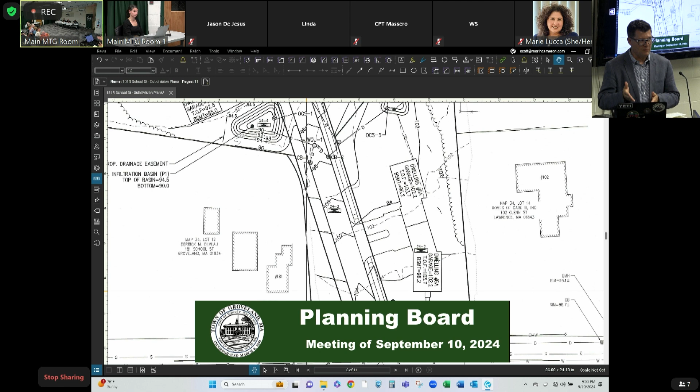So before a builder can even put a foundation in, typically the road has to be to a level of completeness, so that that situation doesn't happen where you have an incomplete road, and there's a whole lot of law behind that as well on what constitutes frontage to qualify for building permit. So you have to have a constructed road to have access to the site. Even during construction, you need to have emergency vehicles enter in situations, so you have to have a road with frontage to build your lot.

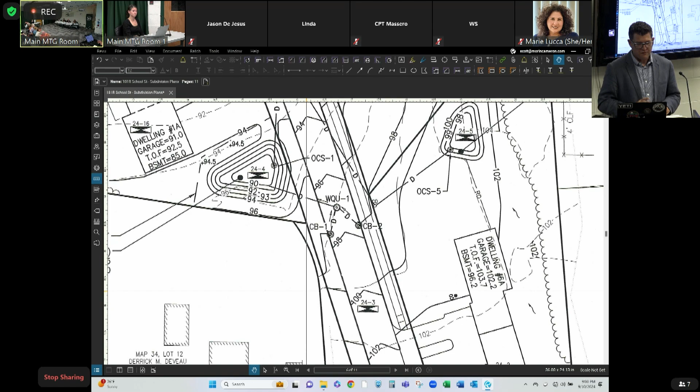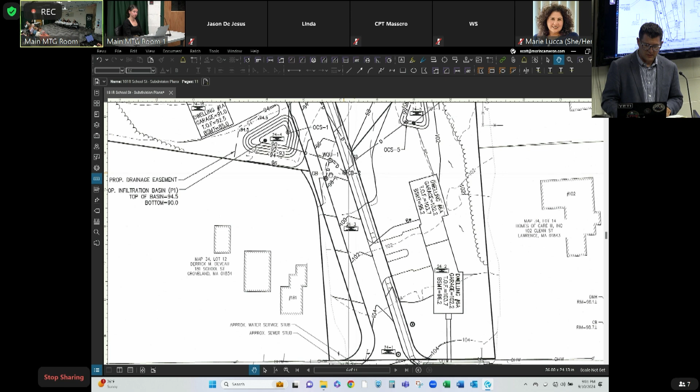With regards to the stormwater management, yes, there are catch basins proposed in the street, and I'll walk through quickly because the peer review consultant is going to cover this as well. But if you look at the screen as you come up, there's a set of catch basins here, right at the end of lot 6, to intercept water coming down the road here. So gutter line, granite curb with the catch basin, which you mentioned you're familiar with.

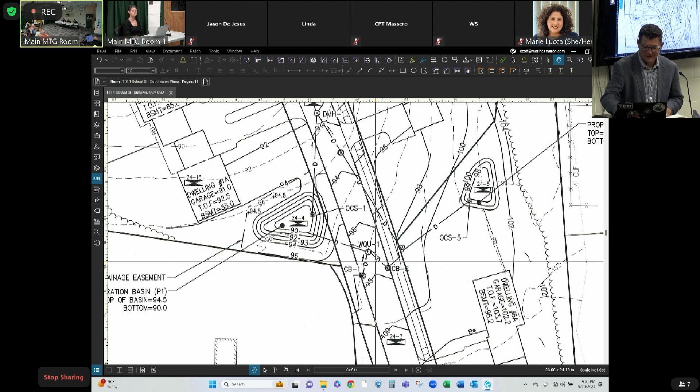Excuse me, what you're saying a catch basin is the grate in the road? Yep. Okay, just making sure I'm clear on your terminology. Thank you. Yeah, the little letter CB, that's the catch basin where you would see the storm grate. Hard to read. It's here.

Thank you. It's tough. Yep. There we go. I know, I'm moving quick. I only had half a cup of coffee before the meeting.

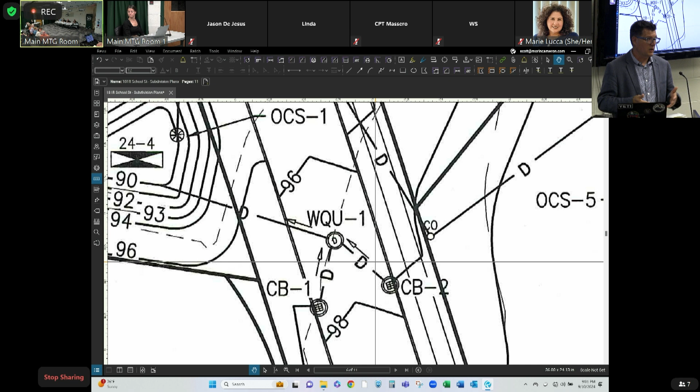So we have these catch basins, and as part of our design work, we look at the type of grate, the size of the grate, to make sure that the water that we intend to go there is all going into that. Okay. So it's being channeled to those before it gets all the way to the end. Correct. In the event that, let's say it gets blocked, leaves, whatever, things happen, right? So, but let's say something happens. Let's say, I don't know, a kid puts a piece of plywood on it. I don't know, stuff happens, right?

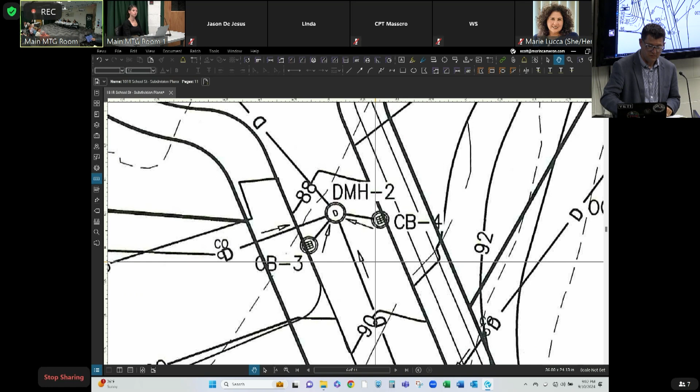We planned for that. There's another set of catch basins a little further down the road, right here. So there's four. And then as you go all the way to the end, there's another one, and this is actually a bigger one. This is a double. So this would be the end of the road, and I'll zoom out slowly so you can see where it is. That's Whitestone here. So there's 1, 2, 3 interception points to get the water off the road, and all the house lots. So all the house lots too.

And then we also designed it so that the road for this whole area, pretty much, if you think of from the center line, pretty much the roofs to the rain gardens, all this, all drains to the road. The road is your low spot. So let's say all the catch basins don't work. The road would have a foot of standing water in it before it then goes to the retention pond, which would be, it's highly improbable that would ever happen.

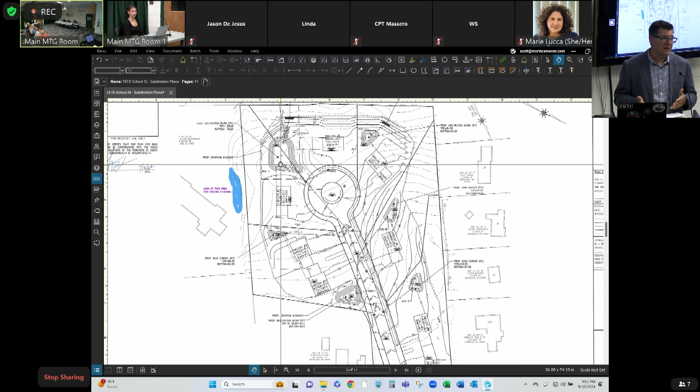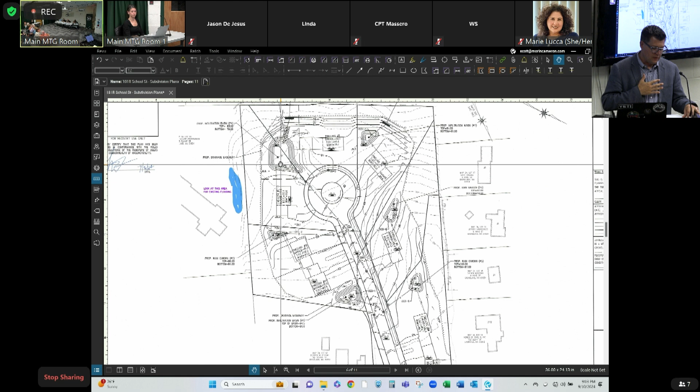So we've put a lot of thought. We heard it during the preliminary process, which helps a lot. That's why I like this process. So we did put a lot of effort into that, and you're not going to take my word for it. The town's engineer is going to review this, and we have a group of engineering folks on either side of the table that are looking at this on your behalf as well.

And the rain gardens that are part of this plan are on the individual building lots? Those are on the lots, and my expectation is that part of the same covenants we're talking about with the trees would also encompass the requirements of the lot owners on these rain gardens as far as maintenance and ensuring they continue to work long-term.

But it would be up to the builder who builds the house on that lot to follow through with that plan. We're gonna work on that. That's part of that earlier conversation of the development of it. As it stands now, yes, that's how it would be, but we as a board know that we need to work on something like that.

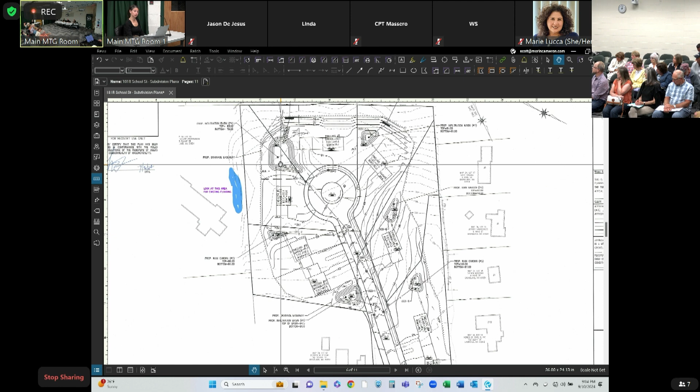Okay, and I would also just like to quickly add that being in a location where I have seen the buildup of the land behind me from a different project channel the water in a different direction than it used to go in, that buildup, that berm, can work in both directions. So I now have more water coming onto my property. Water is on the other side of the berm. Water likes to travel the least path of resistance.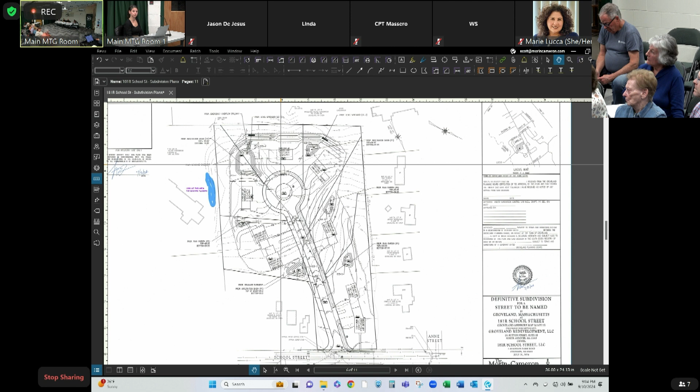I know, of course, that's just how it is. So you're right, it'll go any which way, the easiest way it can. It'll make a little gully and get there. It's gotta be graded properly. Okay, thank you. Thank you. And we've had that before, that we've had developers go back in and redo landscaping because of that.

Hi there, I'm Jess Massero at 4 Anne Street, and I know we want to get out of here, so I appreciate your time and attention to this. I know we've talked about this ad nauseam, so I'll make this brief, beginning on, I think that's drawing C5. I do have overall concerns with the bioretention landscape feature, with the basin and the infiltration to the ground. We are just a steep downgrade from there, and we already have water that comes out sideways from our retaining wall in our backyard. So I know there's more thought going into that, but currently there's large issues.

I teach elementary school, so I do have a 5-paragraph essay to read to you, and I apologize, but I'm better at talking to children. Thank you for the opportunity to speak tonight. I stand before you not just as a concerned resident, but as somebody deeply invested in the character and future of our beloved town, Groveland. 5 years ago, my husband and I carefully chose Groveland for its unique blend of greenery and space, qualities that are becoming increasingly rare as other towns give way to rampant overdevelopment. That's why we moved up here.

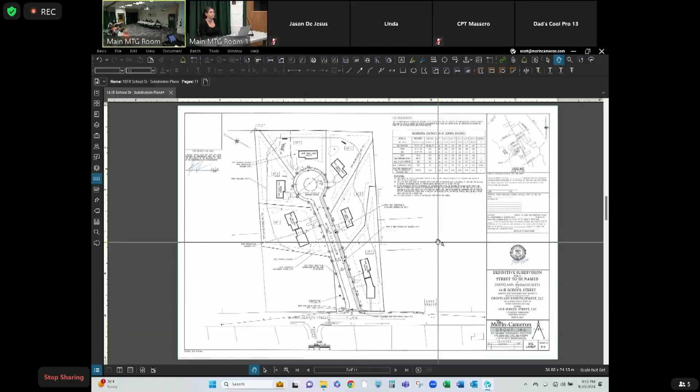Hey, just a point of order, I think we're coming up on hour 2, going into hour 3. So I would make a recommendation to the board - the typical subdivision hearing goes 45 minutes. Not that we want to shut things down, but you should continue this for the input, because you can go late on these, and there's an important thing going on that other people want to see tonight. If you have a few more questions - Hey, Wally, sorry to cut you off, I'm not concerned about going over time, I just need a 2-minute break.

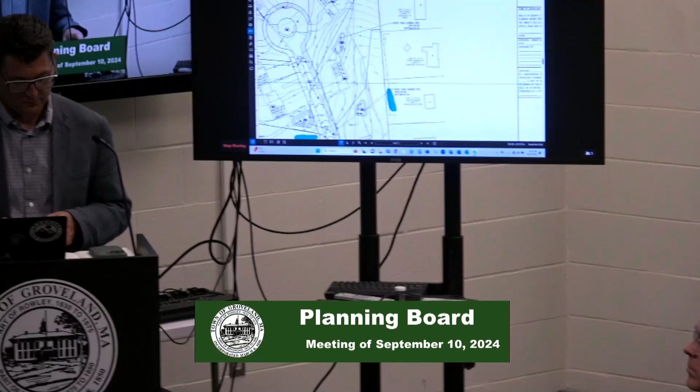I think the last meeting, I invited all you guys the same thing - come walk our lots, and you'll see. It's a yard, it's a hill. We have a small patio with pools, and then a huge hill. So if you add 20 feet past my fence line, I'm going to be looking into someone's bedroom window, and they're going to be looking down on me and my children.

As you look at that tree line, the back tree line is 104 feet in height, and then the home would be back down to 96 feet. So that's not a set plot though, right? Because the builder can decide to do what he wants. Well, subject to setbacks and those sort of things.

Yes, and there's going to be a buffer zone that we're talking about also. So those two things are also happening. But as far as grade, the house is lower than where the tree line would be, and it would sit higher. The house level would be at 96, and then the tree line level would start at 104 and go up from there.

But I am definitely going to take a ride by all of this area and take a look, so thank you. Okay, thank you guys. I'll look at the grades of your lot too, I can get that information, so I'll look at that.

I think - and the other ones too, of course. Yeah, and thank you, we'll take you up on that. I appreciate it. Thanks for taking the time, I know it was a long time to get to you, we really appreciate it.

The water is a concern too. Yes, understood. Pool's flooded a couple times. I have a French drain, not everyone does. So that's what people are going through, right, to prevent the water.

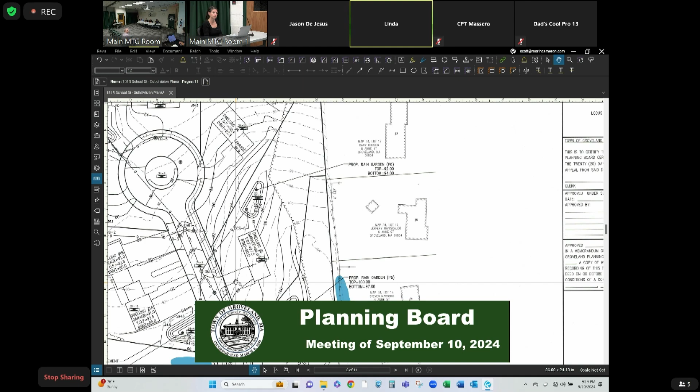All right, any other questions? We're good. Oh, one more. This is Linda Tomaselli, 1007 Alyssa, and I'll be very brief. Could you please zoom out on the first page of the subdivision plan?

Just in general, I'll say that I do share the many concerns about water and drainage, and I'm also quite surprised, actually, to see that the new plan actually calls for more intense development and therefore probably tree clearing, et cetera, than the first one. It is definitely a concern.

But what I want to point out briefly is that if you take a look at this picture, the top of the parcel at issue, during the early part of the presentation, Mr. Cameron said, and I believe his words were, 'There are no buildings there.' That is actually not true. There are several white stone buildings. If you move that cursor down a little bit, yeah, right about there, there are at least 3 buildings with multiple units.

And we've talked about the fact that the grading from School Street back to Alyssa is steep. And at the back, at Alyssa Drive, there's also a drop-off, kind of a cliff. The back of this parcel effectively abuts Alyssa Drive, very, very close, and Alyssa is fairly narrow. So those buildings are all at risk if there is any kind of drainage problem, particularly groundwater.

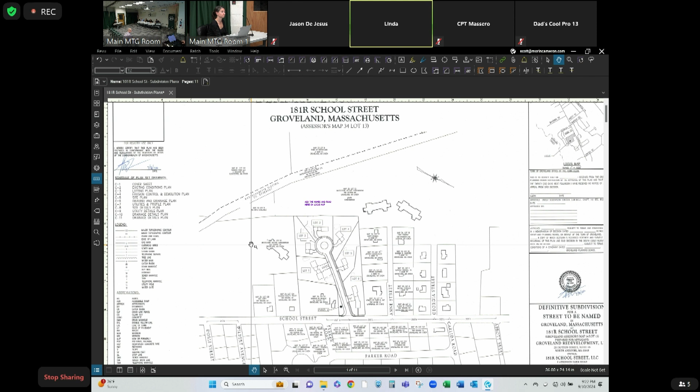Yeah, there is actually an aerial view that I got a copy of during the preliminary hearing. I can't figure out exactly how I got it, other than I think Annie Schindler sent it to me. You probably have it in your files somewhere, and it gives a much more accurate view of the white stone buildings and how they would be affected by this.

Sure, thanks for pointing that out. Thank you, appreciate it. Thank you, appreciate it.

All right, entertain a motion to close public hearing. I'll make a motion to continue the public hearing on the 181R School Street until, did we set the date? We said October 1st? Is that the Tuesday? That's the first. October 1st, but you have a meeting scheduled for September 24th?

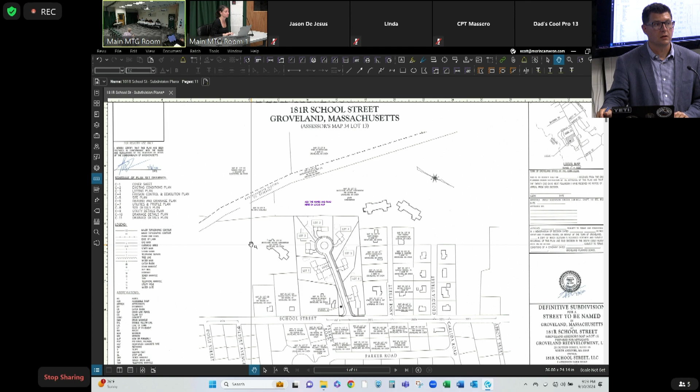I would say a little after the first is going to be tight. So would you want to move it to the 3rd? The 15th, that's our next, we have it scheduled for in October, we have the 1st and the 15th. 15th would be scheduled. All right, I'll make a motion to table the public hearing for 181R School Street to, sorry, continue. Thank you. Until October 15th.

Seconded, so motion, all those in favor? Aye. Do we need to do roll call? You do need a roll call. Roll call of continuing the public hearing until October 15th. Patrick Molina, aye. Chris Goodwin, aye. Dennis McNulty, aye. Jason Aves, aye. Paul Sorensen, aye.

So moved. Thank you. You're welcome, thank you. Appreciate your guys' time tonight. Thank you both very much, appreciate it. Yeah, thank you. Motion adjourned? No, we've got more. Still got others. Okay.

I'm gonna have to depart the hearing. I am not US based at the moment, so I will regroup on that. Just somebody send me the update. I think it was a great meeting. I'm glad everybody put a lot of input in on that.

Next one's right up your alley, Wally. Has to do with the approval. Oh, yeah, what is it? The approval of species of trees for the subdivision. Oh. Awesome. I will reserve my vote, but I'll look at the input. All right, 106 King Street, Katy Lane, approval of species of trees for the subdivision in accordance with the subdivision rules and regulations, Article 5, Section 12A.